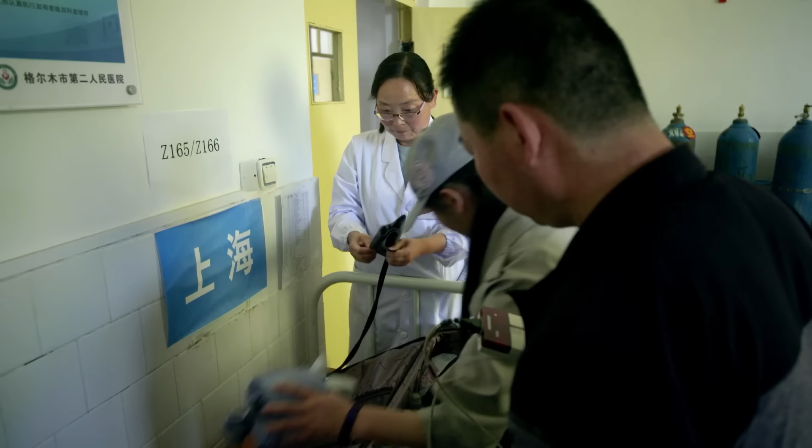The human body is not designed to cope with such low oxygen levels. It can lead to potentially fatal altitude sickness. The most common symptoms of altitude sickness are headaches, vomiting and confusion. It's vital that correct oxygen levels are maintained and any deficit is dealt with immediately. In severe cases where the body's starved of oxygen, it can cause swelling of the brain or lungs, which can be fatal.

These unique trains are specially engineered to protect their passengers as they travel through this beautiful but brutal landscape. Ding Weiyan is the senior engineer. In here is the oxygen generator, which pumps oxygen into the train carriages. These prevent oxygen shortages at high altitude and make passengers feel more comfortable.

Inside, there is an altitude sensor to determine the oxygen levels outside and oxygen concentration sensors to monitor the levels in each passenger compartment. The train is made up of 16 carriages. And each of these carriages has its own oxygen generator, like this.

The passengers also have access to oxygen masks, which they can use if they're having difficulties. Well, if you're just sitting here, then it's all right. But if I climb to the top bunk bed, then I notice that I have some shortness of breath.

As an extra precaution, the railway posts a medical team on every train. There's a doctor and a nurse on board all the passenger trains. They carry oxygen and heart monitors, oxygen cylinders, and a full medical kit. Once they're on the train, they do a patrol every 3 hours to check on passengers. These extra measures on board ensure safe passage for the 2 million travellers who make the journey every year.

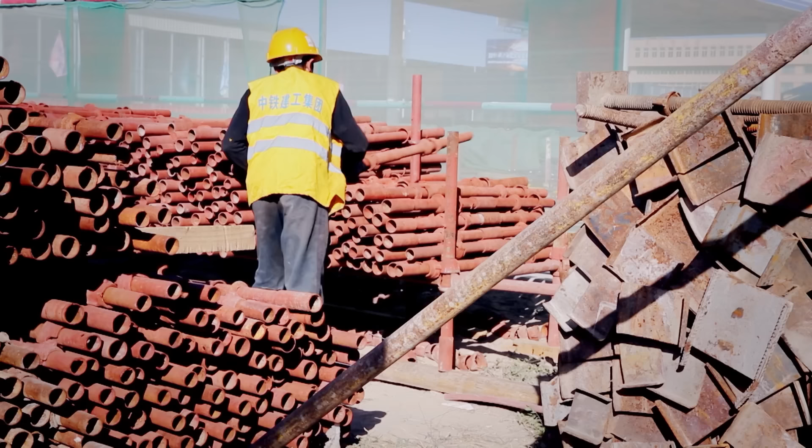But the team who built the line didn't have these luxuries. Construction workers are at a high risk of altitude sickness and hypoxia, a severe lack of oxygen. Doing physical work means your body uses up oxygen very quickly. That made this an extremely difficult project. At first, we thought there was no way it could be completed. They would need to turn to a machine from the past to defy nature and build across the roof of the world.

Humans have never let a lack of air stop them from going to the most extreme environments. Mountaineer George Mallory lugged a 14-kilogram oxygen tank up Mount Everest. Ancient Greeks used diving bells to explore the depths. But the oxygen didn't last long, and the bell could tip over.

And when railway pioneer Isambard Kingdom Brunel wanted to bridge a deep, fast-flowing estuary, he sunk giant metal caissons and pumped in compressed air to create a pressurised environment to build the foundations. But while the engineering was sound, it wasn't so great for the workers.

Dr. Gary Smerdon is in southwest England at the site of Brunel's masterpiece, discovering how experts in engineering and medicine came together to solve the problem. So here we have the Royal Albert Bridge, a fantastic feat of engineering.

Most of the people who travel across the top of this bridge do not have the faintest idea about the effort and the suffering that went into building this bridge, because the feat of engineering to get that pier built down into the rock bed of the river was very new at the time, very dangerous, and they didn't really understand what they were doing.

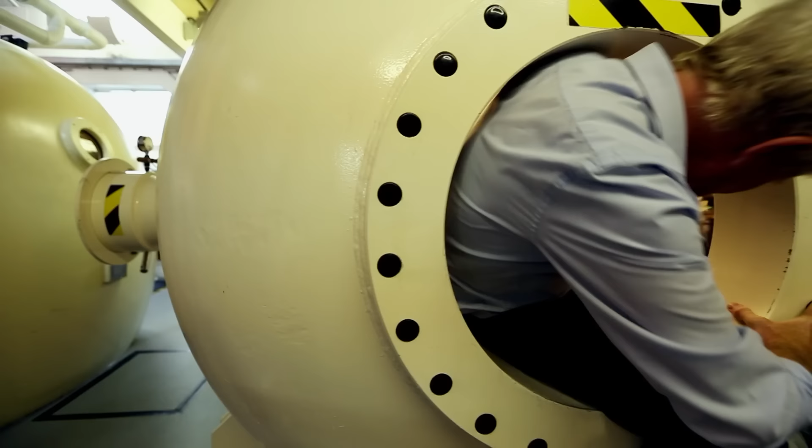The body contains nitrogen gas. When the pressure increases, this gas dissolves into the blood and tissue. But when the body returns to normal pressure, it becomes a gas again. If bubbles of nitrogen gas form, they can gather in joints and tissues, causing serious problems. Kelly's machine was a forerunner of the hyperbaric chamber.

Any problems, just put your hand up, say stop, and we'll take it from there. Lovely, see you on the surface.

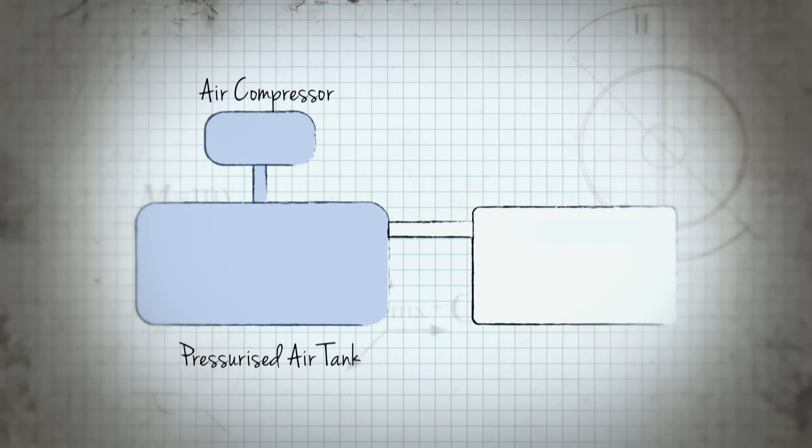Whilst the condition affecting the caisson labourers was very different from what the Chinese workers were suffering from, this amazing machine holds the key to solving both problems. An air compressor creates pressurised air which is stored in a giant tank. It's slowly pumped into the airtight hyperbaric chamber, recreating whatever pressure environment doctors need to treat their patients.

This was the key to treating caisson disease, giving doctors the ability to reduce those deadly bubbles in the blood. So here you are, we're in the chamber now. The door is shut. My colleague Chris is at the controls, and he'll soon be pressurising me and getting me down to the equivalent of 30 metres.

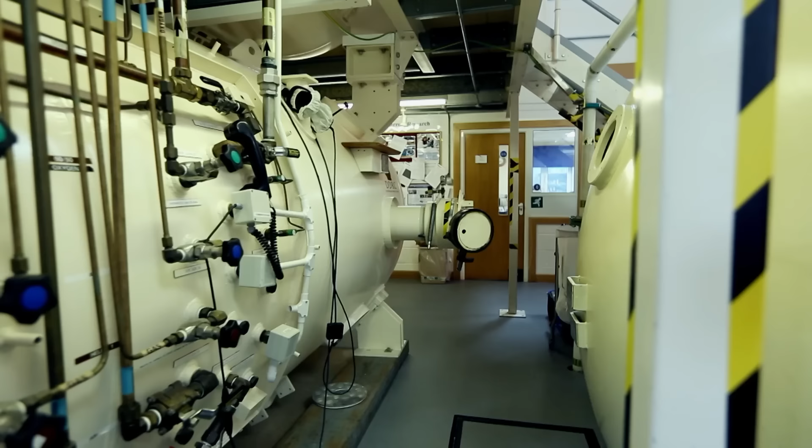And the machine itself can actually be used to demonstrate the very problem it was built to solve with a simple experiment. So with me here in the chamber, we have an empty bottle here that's full of air and another bottle that's full of carbonated water. We'll see what happens to them on the way down. Stand by, blowing down the Comex.

The empty bottle contains air at normal sea level air pressure. So as the pressure in the chamber mounts, the bottle collapses. Okay, that's 30 metres, Gary. Okay. I'm sat here at 30 metres. One of the biggest changes is my voice. That extra density of the gas causes it to pass differently over my vocal cords, and I speak in a very strange manner.

The water, which was carbonated at normal air pressure, has completely lost its fizz. And there we have a glass of carbonated water. At this pressure, the gas molecules are dissolved in the liquid, but the gas is still in there. This water represents blood in the body. So when we go back to the surface, you will see bubbles will start to appear. Now that's exactly what was happening to these caisson workers. When bubbles start to appear in your blood and in your tissues, as a human, you're in trouble.

It was discovered that the key to avoid bubbles forming was a slow ascent, giving the body time to equalise. This machine allowed doctors to simulate a slower controlled ascent, saving the lives of caisson workers. Oh, here we are, back on surface again. It's nice to be out.

Now we know how to come back up safely. As you saw, it's a slow ascent. In the old days, they'd take the top off the valve and reduce the pressure, and people bubbled inside, and that's what caused all the problems. But now I've been down, I've come back up to surface, absolutely no problems at all. Feel the same as I did when I went down.

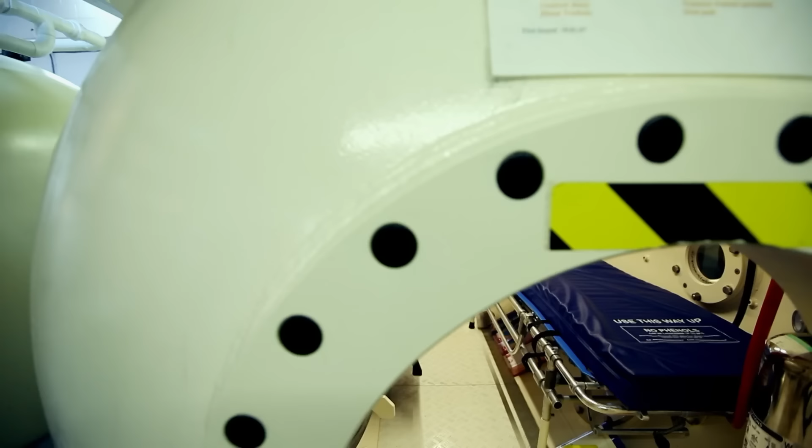In China, the team building the railway realised that this 150-year-old chamber could be put to a different use. On the 29th of June 2001, the build began of the highest section of the railway. This was the base hospital for the construction team. We provided a lot of medical personnel and support. This hyperbaric chamber was used frequently.

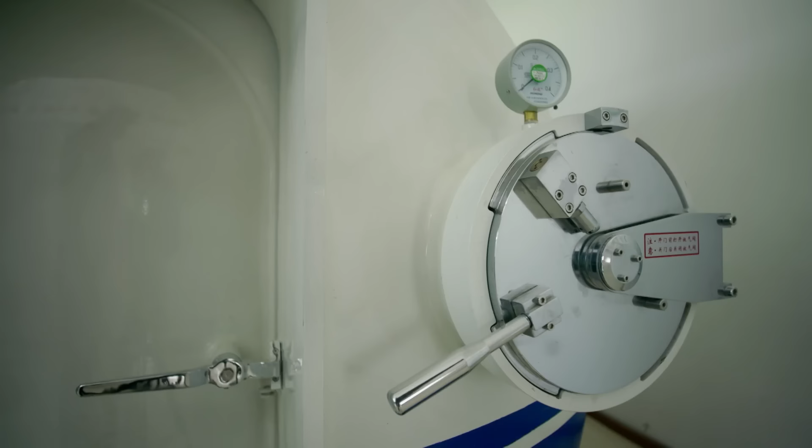The construction team went through 120,000 bottles of oxygen each year, but even that wasn't enough. There were many critically ill patients during the construction of the railway. Our medical staff were first on the scene to give initial treatment and, if necessary, to transfer the patient to the hyperbaric chamber. These chambers were vital. They saved patients' lives.

When you're working at 4,000 metres altitude, getting back down to sea level isn't easy. But by placing workers suffering from altitude sickness into hyperbaric chambers, they could effectively simulate a move straight back down to sea level, meaning treatment could start immediately. Engineers installed 25 chambers at strategic locations along the 1,100-kilometre line.

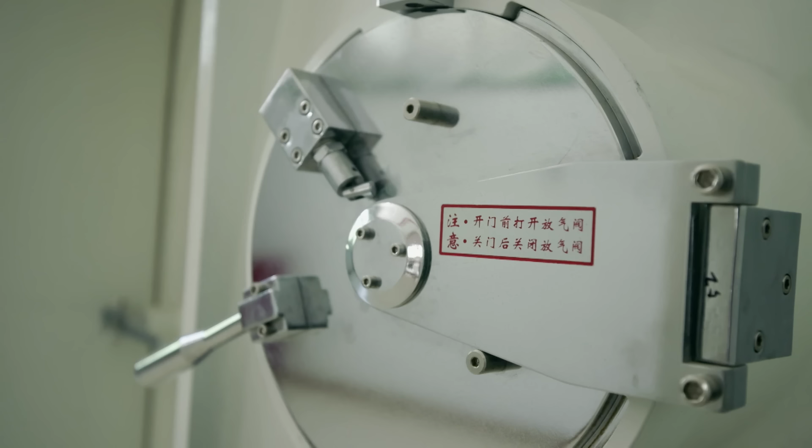During the construction of the railway, the success rate for saving lives from acute altitude sickness was 100%. There were no fatalities. This line is a milestone in the history of railways. I'm proud of it, and I'm very proud of being part of the medical team during its construction. This machine helped keep the 100,000 workers who spent 5 years building this inspirational railway safe.

With construction crews hard at work to link Lhasa to the rest of China, the biggest engineering challenge still lay ahead. If the ground melts below your foundations, you're in real trouble. A railway line is at risk of collapse, derailing any trains trying to use it.

Mount Everest, the highest mountain in the world. The Himalayas make up the southern edge of the world's largest mountain plateau. Stretching 1,000 kilometers north, the Tibetan Plateau is the breathtaking setting for the highest railway on Earth. In the past, people thought a railway to Lhasa could never be done. It's one of the most remote cities in the world. But this didn't stop the Chinese engineers, and the engineering challenges they faced were immense.

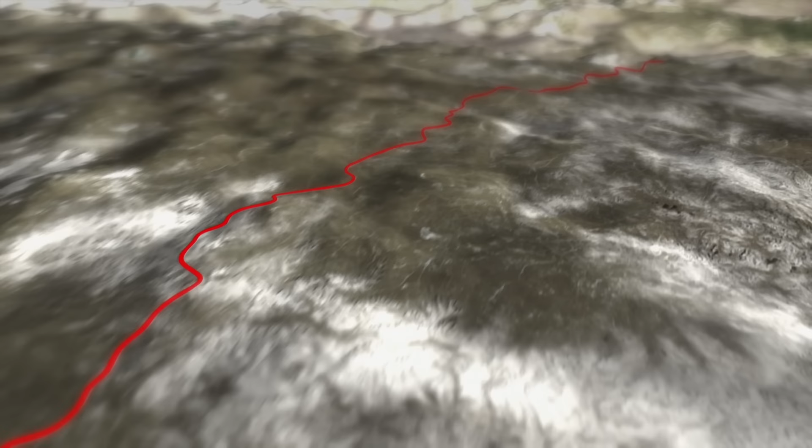The city of Golmud sits at 2,800 meters in the foothills of the Kunlun Mountains. To link it to Lhasa, engineers needed to find a way to run rails across the permafrost, the permanently frozen ground of the 2.5 million square kilometer plateau beyond. Wang Xingchang is Professor of Engineering at the Railways Research Institute that was tasked with achieving the impossible. He regularly makes the 8-hour round trip from Golmud to the heart of the plateau to monitor the ground conditions.

The area we're in now is typical of the Tibetan Plateau. It's called no man's land. 2 or 3 meters beneath us is permafrost, which is permanently frozen ground. It's incredibly cold here. The annual average temperature is between -2 and -7 degrees. It's these low temperatures that create the permafrost on the Tibetan Plateau.

Building anything in this environment isn't easy. Frozen ground can actually provide the perfect foundation for building on, but with one important condition: it must remain frozen. If the ground melts below your foundations, you're in real trouble. A railway line is at risk of collapse, derailing any trains trying to use it. So how do you keep hundreds of kilometers of ground frozen solid enough to build on? For inspiration, the engineers turn to another frozen territory 7,000 kilometers away.

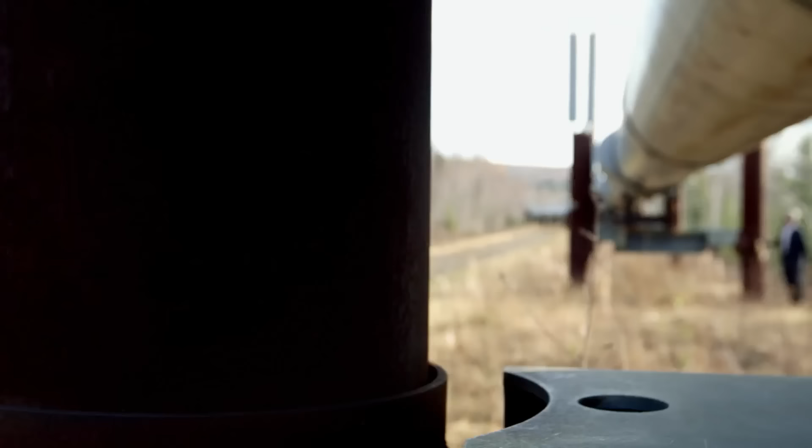This is the Trans-Alaska Pipeline, an $8 billion creation that carries up to 2 million barrels of oil a day across the entire state. As you can see, it's a very large pipe, roughly 1.3 meters, 48 inches in diameter. It's full of oil. It's been full of oil since the late 1970s.

The design focused on an elevated pipeline to keep the warm pipe away from that frozen ground. But the foundations for the support columns still needed to rest on solid, frozen ground. If it melted, whole sections of pipeline could collapse. Luckily, one man had an answer. In 1963, nuclear physicist George Grover developed a system to transfer heat that would be crucial for engineers trying to build on permafrost.

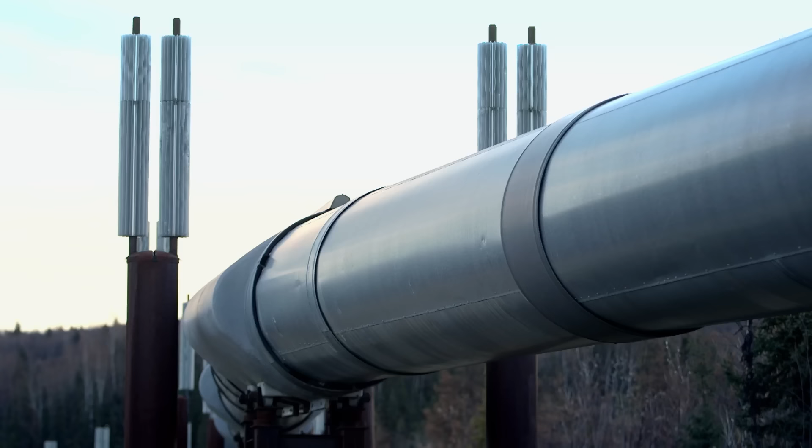You can see that each of these vertical support members are capped by 2 finned sections. Those fins sit on top of a device known as a thermosiphon. These thermosiphons are used to ensure that the ground that the vertical support members go into remains frozen. The vertical support members rely on that frozen ground strength to hold the pipe up.

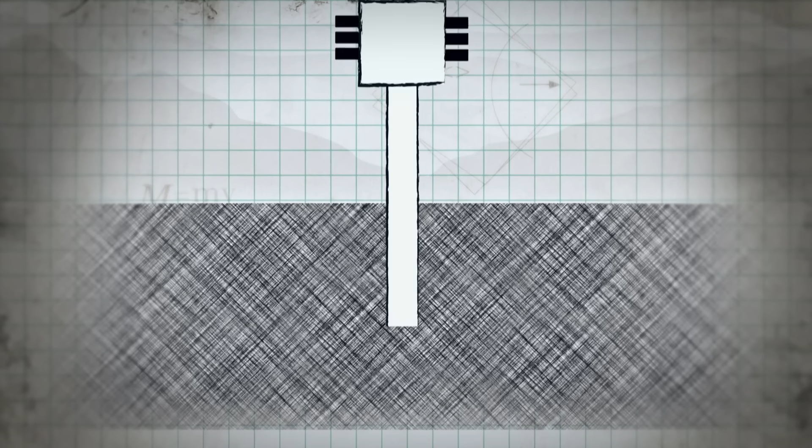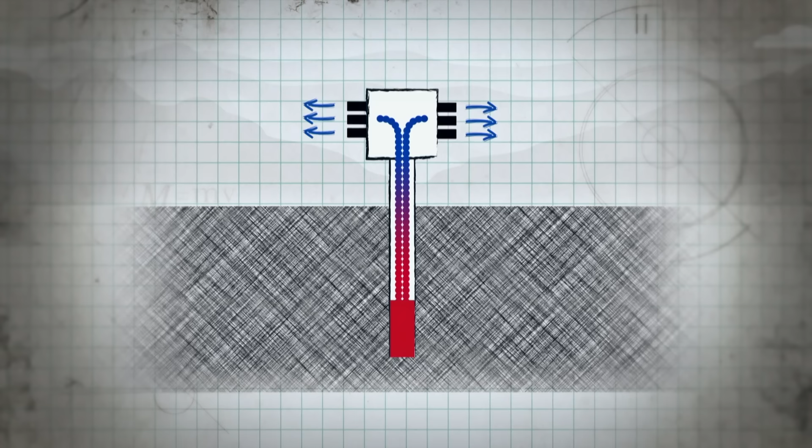A thermosiphon is essentially an empty tube which goes through the marshy bog down to the frozen ground. At its base is a liquid refrigerant with a low boiling point. When the temperature rises in the ground, the liquid absorbs the heat, starts to boil, and then evaporates, dissipating the unwanted heat through the tube and into the atmosphere, keeping the ground around the foundations cool.

What I have here is a canister of butane, which is similar to the refrigerant that's used in the thermosiphon. And what I'm going to do here for our demonstration is get a little bit of liquid butane into this plastic bag. So you can see that I have liquid in the bag here. What happens at the base of the thermosiphon is that liquid boils.

And you can see that when I add heat by putting my fingers on this bag, that I get pretty vigorous boiling of the butane. This is the same thing that's happening at the base of the thermosiphon. In this case, the butane is collecting heat from my fingers. In the case of the thermosiphons, the refrigerant collects heat from the permafrost and pulls heat out of it, dumps that heat into the atmosphere.

Over 100,000 thermosiphons help to keep the oil flowing. This pipeline project really is an engineering marvel. It's been stable for on the order of 40 years. Really, I think it's safe to say that the engineers who designed this solved the permafrost challenge.

The permafrost challenge has not beaten the team in Tibet either. Here they've used the thermosiphons on a massive scale, stretching as far as the eye can see to cross over 500 kilometers of permafrost. These thermosiphons are the best way to solve the problem. It's a great solution. Its main function is to decrease the temperature of the ground and prevent the permafrost from melting. This is the part that releases heat.

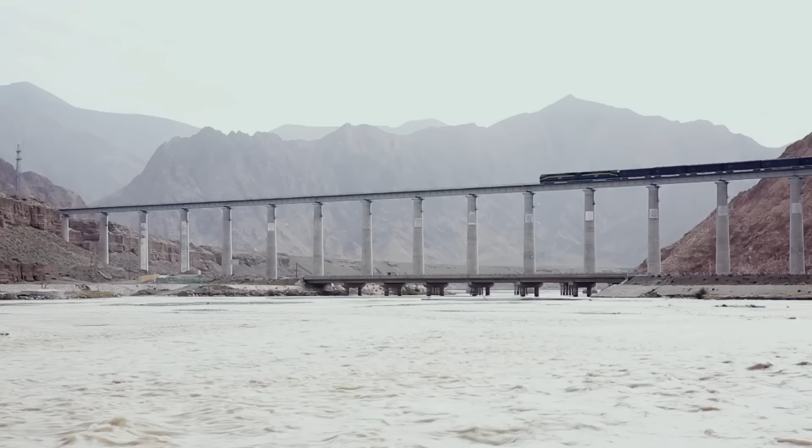With the groundbreaking line complete, engineers still had another major hurdle before any trains could use it. Regular locomotives just wouldn't be able to cope with the lack of oxygen. They wouldn't get anywhere near Lhasa.

The Tibetan Plateau is known as the roof of the world. Crossing it is the highest railway on the planet. The engineering that's gone into this project is mind-blowing. It was almost impossible to conceive of a railway running at this altitude. It's an extraordinary feat of human ingenuity.

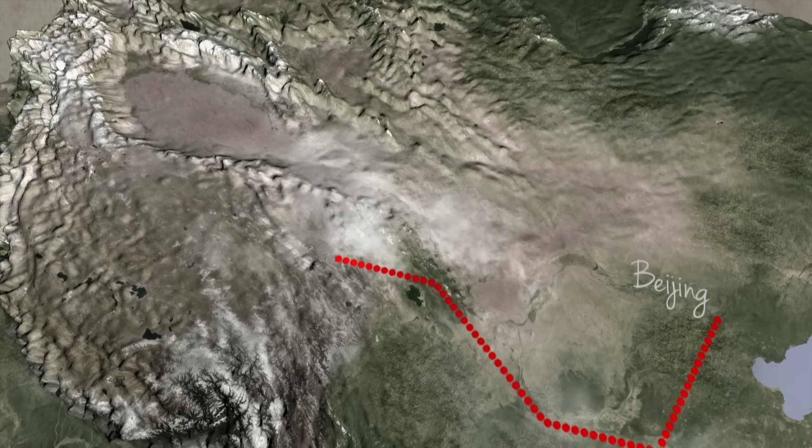To construct this £3 billion line, engineers overcame huge hurdles. But coming up with a locomotive that could handle the altitude almost scuppered their ambitions. Across most of the China railway network, electric locomotives are used, which draw their power from overhead cables. The Shanghai to Lhasa Express uses these for the first part of the 47-hour, 4,300-kilometre journey across the country.

But when the train reaches Golmud, it runs into trouble. In the isolated high-altitude plateau, extremely low winter temperatures combined with lightning storms means that electricity supply cannot be guaranteed. So they can't install the overhead cables necessary for electric trains. Normally, railway engineers would turn to a regular diesel locomotive. Combustion engines need fuel and oxygen to work, but at these altitudes, there's just not enough oxygen to give enough power to the engines to haul the huge trains up the steep gradients required.

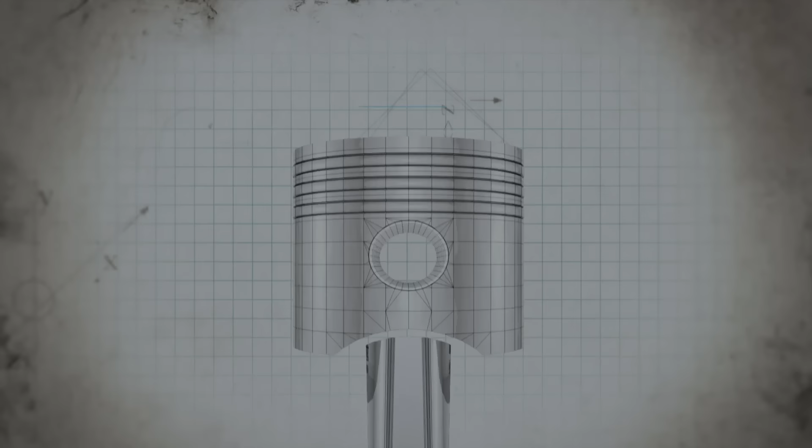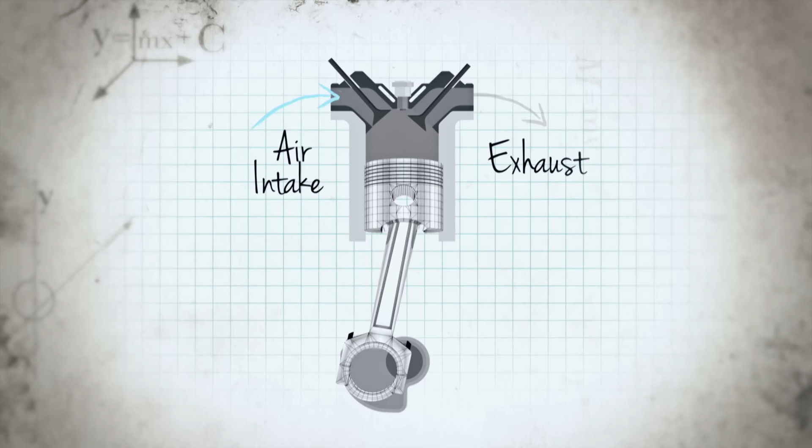Internal combustion engines draw air into the combustion chamber to mix with fuel. The piston compresses it, then the spark plug ignites it. This controlled explosion forces the piston back down the cylinder. But as oxygen levels drop, so does the force of the explosion and the power produced. Regular locomotives just wouldn't be able to cope with the lack of oxygen. They wouldn't get anywhere near Lhasa. To get trains to run at such high altitudes, the engineers needed to look to the skies.

Mechanical engineer Dan Dickrell is exploring Pikes Peak, one of the highest points in America's Rocky Mountains. It was here in 1918 that a landmark experiment changed engine design forever. Driving this really muscly car up one of America's most iconic highways is quite exciting from both an engineer and an auto enthusiast perspective. The terrain is twisty. It's a wild ride for sure. But as the road climbs, the amount of oxygen in the air falls.

I've reached the halfway point of Pikes Peak. For my body, I can sense the lack of oxygen through my lungs. My lungs are telling me there's not enough oxygen in this air. I cannot perform at peak efficiency. I can feel that lack of oxygen at this altitude, and so can the automobile. The bottom was really snappy. It's starting to get a little bit more sluggish.

At the 4,302-metre summit, the oxygen is almost 50% lower than at sea level. All right. I can really feel it. Lightheaded, do not feel great. Now on the way up, the internal combustion engine inside my car, it could feel it too.

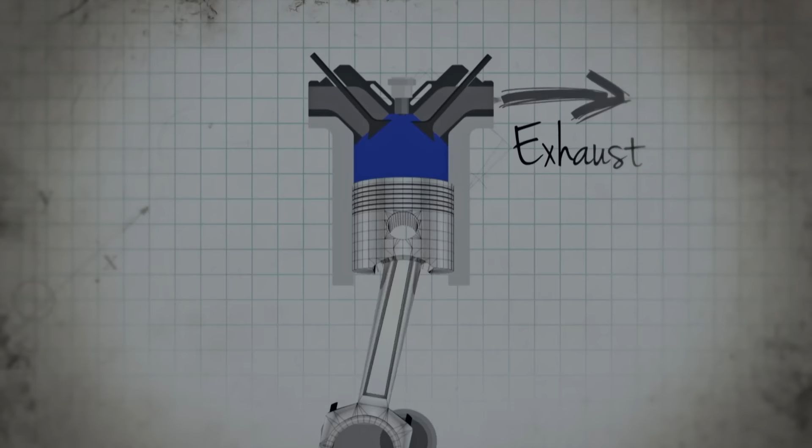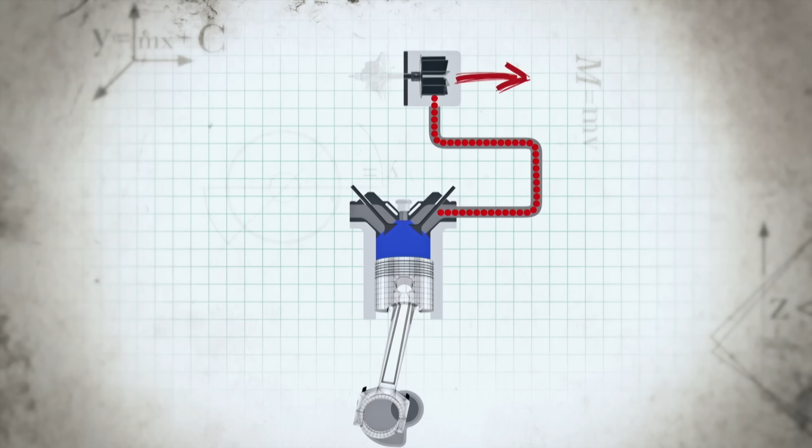To help the US Army Air Force solve their lofty problem, they drafted in steam turbine engineer Sanford Moss. Sanford Moss developed a revolutionary piece of machinery that would force more air into the airplane engine, essentially turbocharging it. Moss's turbocharger was a total game changer. Instead of just being wasted, the engine's exhaust gas is used to spin a turbine, which in turn powers a compressor which draws in air, compresses it, cools it, and pushes it into the combustion chamber. This high-pressure mix, when ignited, dramatically increases the engine's power.

To demonstrate the difference it makes, first we need to see how an engine performs without it. This is going to serve as my cylinder. Inside the cylinder, we're going to put a mixture of fuel and air. Instead of gasoline, I'm going to use butane. Now what I'm going to do is take this butane and inject it into my cylinder. And 2 metal electrodes are going to serve as a spark plug. I'm going to introduce 2 alligator clips that will provide electricity in 3, 2, 1. Cool.

All right, now we're going to repeat the same demonstration, except this time I'm going to turbocharge the cylinder. To do that, still need some fuel. Now this time we're going to introduce a slightly different cork because this one has a valve in it. That's going to allow me to pressurize the cylinder just like a turbocharger would. We lock down, give it a few good pumps. So now I've got my pressurized cylinder.

In 1918, Moss and his team came here to carry out their first high-altitude tests. He put his new turbocharged engine on the back of a truck and attached it to a giant propeller. The output had been 230 horsepower, but with his new invention, it was boosted to 356 horsepower. Three years afterwards, a biplane fitted with a Moss device broke the altitude record, flying higher than any other airplane had flown before. Turbochargers exist all over the place. Really impressive pieces of technology.

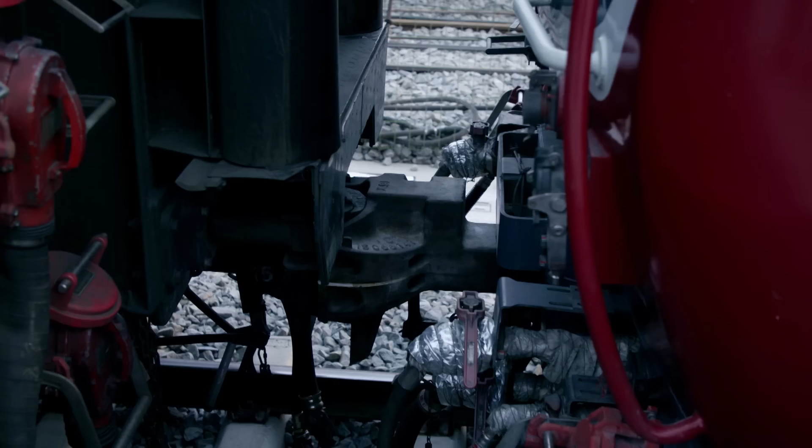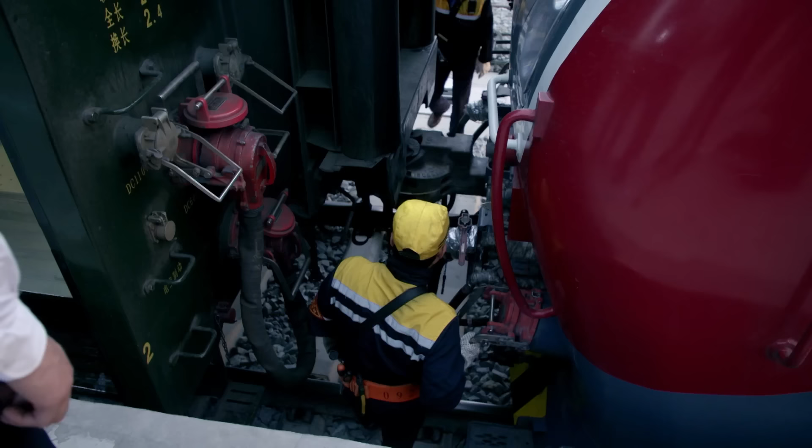In China, engineers have fitted Moss's turbocharger to special locomotives to give them the power to cross the high-altitude Tibetan Plateau. At Golmud Station, locomotive engineer Shen Deji is monitoring the switchover. This train has just arrived from Beijing to the east. It's an electric locomotive, powered from the overhead cables. After the crew have disconnected all the wires, it will be pulled out so that the new locomotive can come in. With the passengers eager to continue the next 14-hour leg of their journey to Lhasa, the train crew must move quickly.

This is our solution to the high-altitude problem. It's a tailor-made plateau diesel locomotive, especially designed for the Qinghai-Tibet line. It's about to be connected to these carriages. These turbo diesel engines provide 6,000 horsepower to pull either 20 passenger carriages or a whopping 3,700 tons of freight at speeds of up to 120 kilometers an hour.

I had the honour of driving the first train to cross the plateau to Lhasa. So whenever I see this incredible advanced locomotive coming into Golmud, I feel excited, very excited. If we'd not managed to build this turbocharged locomotive, so many people just wouldn't be able to get to Lhasa. I feel very proud of this solution.

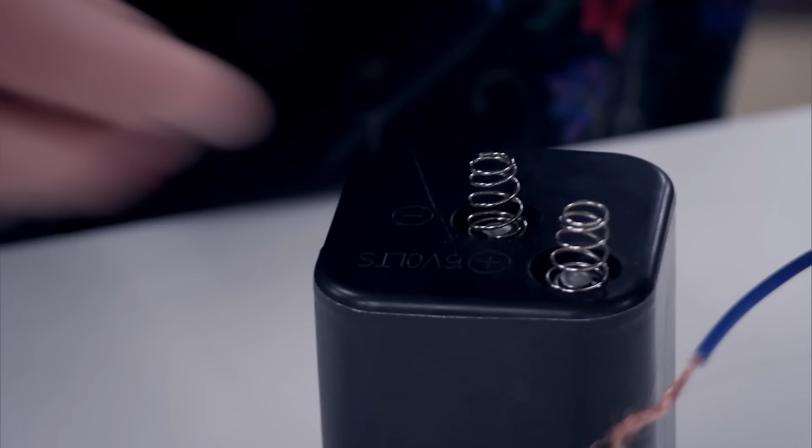In 1837, William Fothergill Cooke and Charles Wheatstone struck upon a brilliant concept. Here I have a compass, an electric wire, and a lantern battery. The breakthrough that Cooke and Wheatstone discovered was that by using these simple ingredients, you could send messages over really long distances. It works like this. If I attach one end of my electric wire to the positive terminal on the battery and then attach the other to the negative, I create a complete circuit. This induces a magnetic field which should deflect the needle on my compass to the right.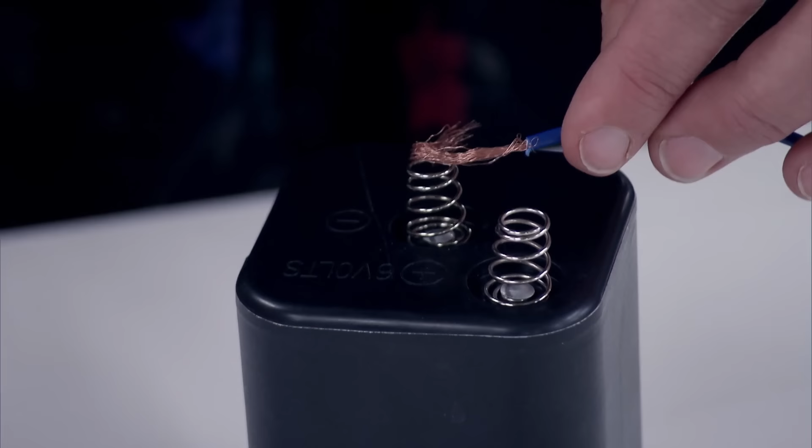If I reverse the terminals, so I remove this one, now attach it to the negative, this one now to the positive, what you'll see is the needle now deflects to the left. By using the simple method of electromagnetic deflection, Cooke and Wheatstone had discovered the first ever form of electronic communication. The first test took place between two London stations, Euston and Camden Town. A telegraph wire was laid in a tube alongside the track with a special device at each end.

Cooke and Wheatstone built this instrument, the 5-needle telegraph arranged on a grid of letters. Now in my version, this bit represents the sending element, and this bit over here represents the receiving element. These rods in the middle represent wires. Because the sending telegraph is connected in the circuit to this telegraph, when I move this needle one way, the action is mirrored in the receiving telegraph over here.

So for example, if I wanted to spell out the word stop, I start with the letter S. On my sending, I'll move this needle so it points towards S, and I'll move this needle so it points towards S. Then the person on the receiving end will look for where the points of those needles converge. I then need to move the needles so that I can get them to converge on T. This device enabled its users to spell out words and send them down the wire. Their feat of engineering brilliance was to send the first communication electronically on the railways.

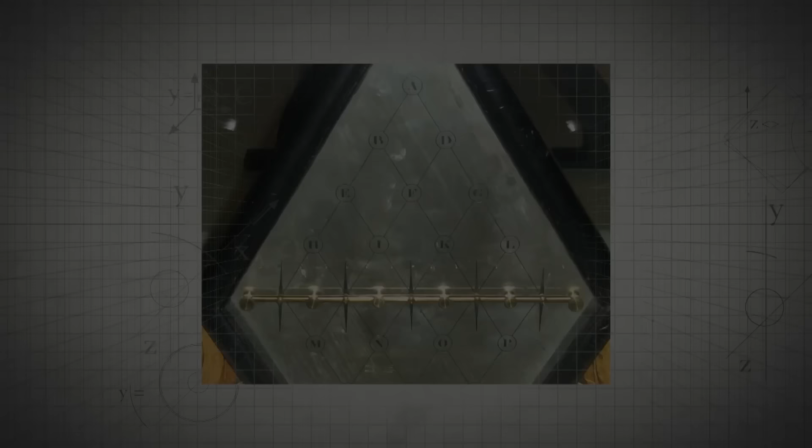The needle telegraph started a telecommunications revolution. Adopted by the railway network initially, it soon went round the world. Eventually, Cooke and Wheatstone streamlined this system into just one needle that through a series of movements could create a coded message. This system of signalling lasted on the railways well into the late 1930s.

In China, they've taken this 180-year-old concept and given it a 21st century makeover. Third-generation railwayman Wang Jianmin is deputy manager of the Golmud depot. Between Golmud and Lhasa, we use satellite positioning signals. You won't see a single trackside signal on the Golmud-Lhasa line. We use the satellite positioning signals due to the tough weather conditions and 4,000-metre high altitude. This is a great piece of technology. It's a massive leap forward.

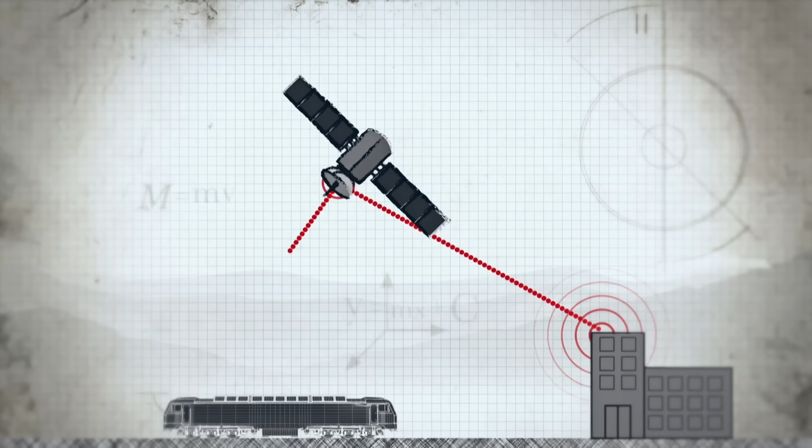The train control system is run from a control room at Xining Station, with global positioning satellites determining the train locations. All signalling is virtual. Instead of wayside signals used by Cooke and Wheatstone's system, all information is communicated directly into the train cab, where an onboard computer terminal displays up to the second information to the driver. The advanced technologies implemented along this line are unique in this country. They are the only reason that we can provide Tibet with the Heaven Road Railway that's been so important for their economic growth and social development.

The Golmud to Lhasa line has transformed travel across the Tibetan Plateau. Business increased quickly once the Golmud to Lhasa line opened. Just in the last year, we've dispatched over 1 million passengers. And the goods we have transported by rail have sharply reduced the number of lorries on the road. Lifestyle products, building materials and daily necessities such as oil are basically all transported by rail now.

Building a railway line across the roof of the world was never going to be easy. When we were young, we didn't think there would ever be a railway between Golmud and Lhasa. I think it's a milestone in the history of global railway. The unprecedented and ambitious project stands as testament to the tenacious perseverance of the human spirit. If this special locomotive didn't exist, so many passengers wouldn't be able to get to Lhasa. So I feel very proud of this train.